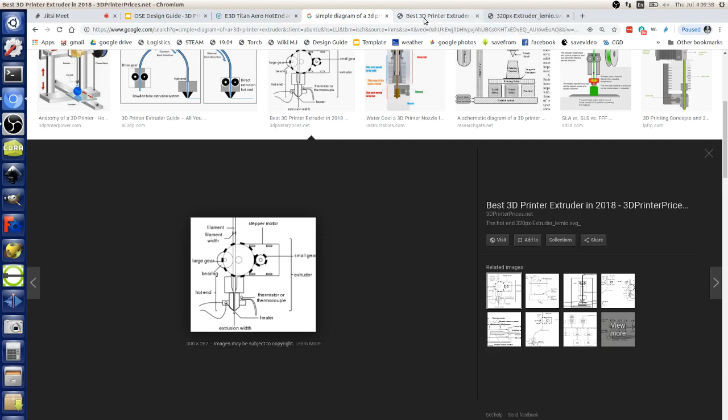So let's look at another image of an extruder, just a basic simple diagram of a 3D printer extruder. So here's a decent one. Let's just take a look at this one for what I just described. Okay, that diagram there is kind of small. Let me go back up. Open image in new tab. Let's just expand this and take a look at this picture. So it's a simple diagram. You've got the stepper motor.

In this case here, what you have is a gear down extruder, and that's actually what happens within the E3D Titan Aero. That's what we're using right now in our printers. So you've got a small gear driving a larger gear, which then feeds the filament. So you've got gear reduction, so you want to push with as much force as you can. The gear designs are necessary if you're working with 3mm and up. If you're using 1.75mm filament, you don't need a gear down from the stepper motor typically. And typically here we're using NEMA 17 motors.

So the filament goes down, it gets pushed, and what you see there is also found in other machines, such as the wire feed of a welder. So if we open source the design of a generic 3D printer extruder, then we also get into applications like wire feeds for welders, or perhaps wire feeds for mixing alloying wire into your induction furnace. So anywhere you have to have a feed of some kind of a wire, large or small, this kind of mechanism is quite relevant.

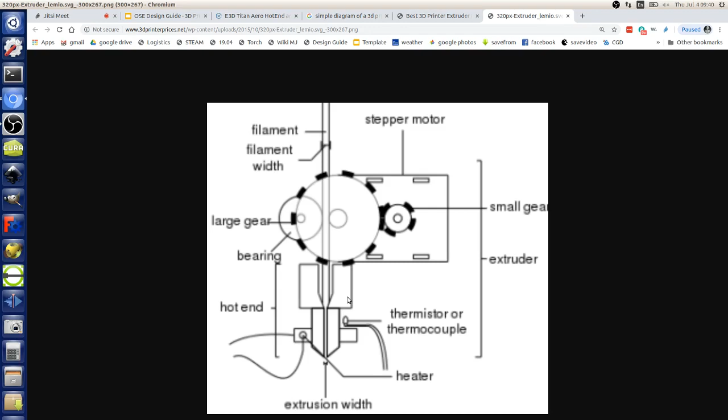So you've got the wire feeding down, you've got a heater element, and then the nozzle and a thermistor, because you need to detect what temperature you're at. You have to know what to set it to. Your software takes care of that, but you have to have feedback to know what temperature you're at. So that's the generic design of an extruder.

And then there's two main types of extruders: direct versus Bowden. So this is the generic diagram here of direct drive versus Bowden drive. In direct drive, you've got the gears going directly into the heater block and nozzle, whereas in the Bowden style, you've got the wire feed separated from the heater block on your gantry. So the filament feed can be mounted anywhere on the printer, farther away from the nozzle. Now you can guess that may be limited. It's got advantages and disadvantages.

The advantage of the Bowden setup is that the tool head becomes very light. You just have to carry the heater block and nozzle. You don't have to carry the relatively heavier stepper motor and all the other drive components. Not necessarily that you're able to achieve higher speeds, but you have less inertial effects, meaning you've got more stable prints. There's less shaking as you reverse direction, so you can go much faster. If you have that entire extruder on a gantry like we do, your frame has to be stiffer to accommodate all of that.

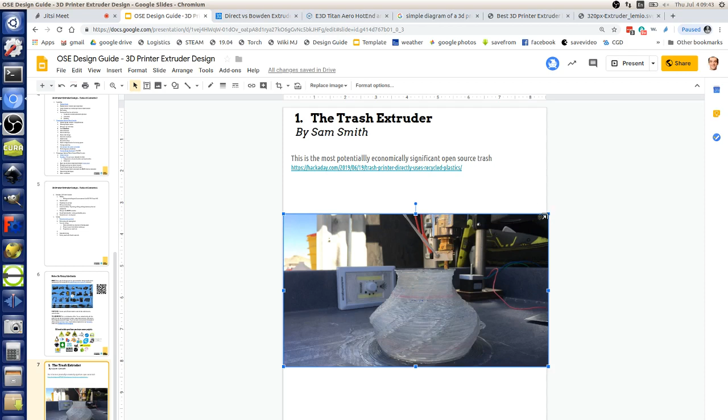Matthew? Question about the thing about extruding trash, because my understanding was that you have different plastics with different melting points and different material properties, and so it seems like you have to at least select your trash very carefully. Is that true? Yes, absolutely.

If you want to do generic brute force printing with a large nozzle, you're throwing everything in there, you're going to get a mix of uncontrollable qualities, which may be acceptable for a thing like outdoor exterior plastic lumber, which doesn't have to have a lot of precision. But typically, if you want any engineered control, you want to separate your trash, and more than that, even know what kind of plastic that is. There's many types of ABS or PLA blends.

When you think about 3D printing filaments, the material science there, you can have a blend of anything with anything, and you have to know its properties if you're going to have controllable results. Here, for example, Sam is printing directly with polypropylene, I believe. So he had polypropylene that he shredded up and put into the system.

But if you want engineered quality and controlled results, you have to know exactly what you have in there, because you don't want your filament to have one property at the beginning and completely different properties at the end of that filament, because you're just going to mess up your prints. So there is the whole material science aspect of that. But the good thing about it is we can experiment a lot with it.

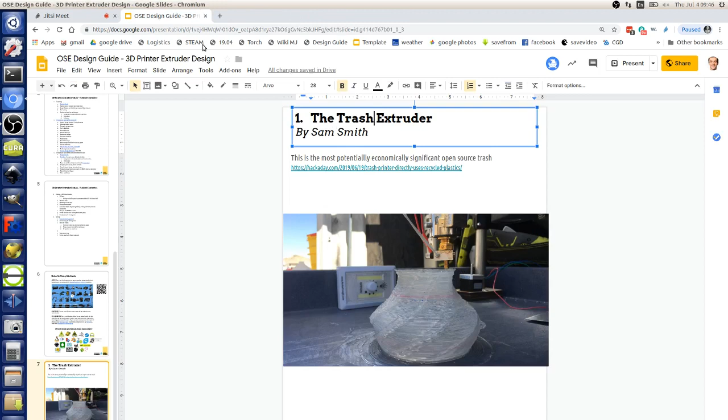So moving on here. So those are the main types of extruders. This is absolutely open source here. There are open source versions of this, but nothing is well defined, well refined. I think Sam is doing the most cutting edge work on this that I've seen, at least. There's a lot of work like this in various countries. Most of it's partly proprietary.

So once again, we are into the issue of people saying, "Oh yeah, now I'm gonna make millions, and I'm gonna hide this because this is too good." That's a typical issue with open source. Once you get something that actually works, maybe 99.9% of the people disappear, and that's one of the challenges of the collaborative literacy in our world today.

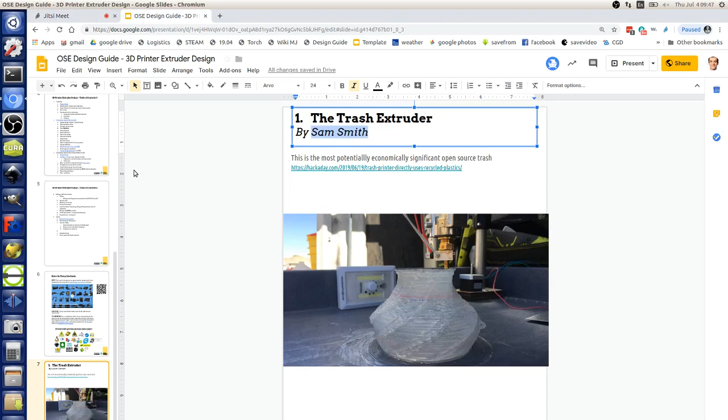Okay, so moving on to more topics here. So let's talk about designing the optimal plastic extruder. So we'll go to a page, and when we talk about an optimized plastic extruder, that means something that can handle both regular plastic and rubber. I don't see any reasons why you cannot optimize for both in one. So here's what I've drawn up so far in terms of what optimization would look like, and it might look a little different than standard ones.

So, design rationale. First of all, if you want really good feed on your filament, you want to have two drive gears, one from each side. If you're driving from one side, typically what happens is you drive on one side and the other one is an idler that does not spin, or it's not actively driven.

If you want the higher, this is now for larger, faster, better extruders. You want to first of all start by driving from both sides. Now maybe you even want to do a second set of drive gears to get double that drive force there. Because the thing is, because plastic is soft, it will wear out. You can only push it so hard with a set of teeth before you actually wear it out. So for optimization, you definitely want to start with double-sided drive.

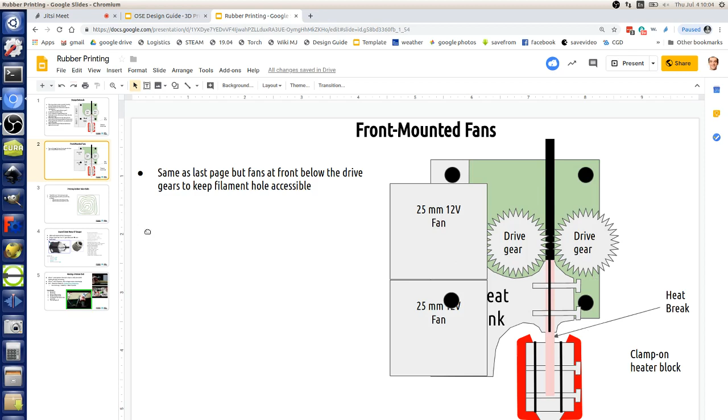So we kind of talked a little bit. Here's just another configuration. I was thinking, okay, where are we going to put the fans so that we can still cool the system? And printing belts on a small area, you can just curl up your belt on a print bed, so you can get like a 2-meter belt on an 8-inch by 8-inch bed, mixing metric and imperial here. But that's the case for rubber extruders.

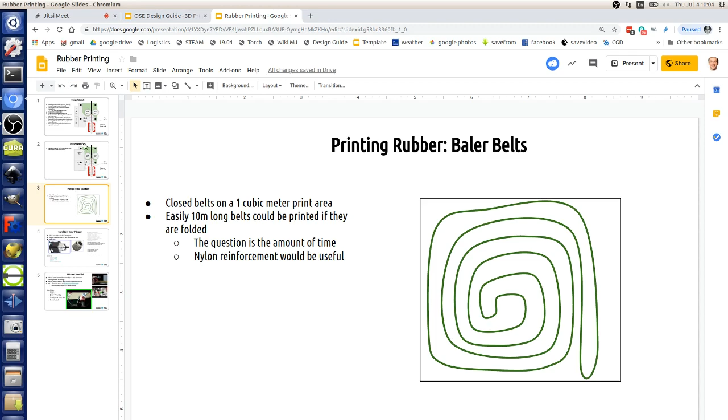This design here is optimized for rubber. The shortest possible path between the drive and the heater part. So I'm including the clamp both at the heatsink area and at the heater block area, which means that the component there is not a threaded long tube. It could be just a tube, which is much easier. You don't have to worry about first threading that tube. So absolute simplicity.

This is the next generation. This is going to be universal in a few years, and you've seen it here. I mean, it has to be. When we talk about improving performance, this is such a gap in the community right now. You cannot really print anything large with rubber right now. Yeah, you can print in rubber, and people advertise that, but very slowly. Not in a way that is economically feasible if you talk about actually making real parts.

What thickness are we talking about with the filament? Here we're starting with 3mm filament, which is off-the-shelf standard. When we design this ourselves and start extruding our own filament, we probably want to go to 4 or 5. So you have an easier way to print. The larger the filament, if you have an error in its diameter, that error will be less as a fraction of the overall width. Therefore, the quality control requirements for producing larger filament are much decreased compared to 1.75 filament.

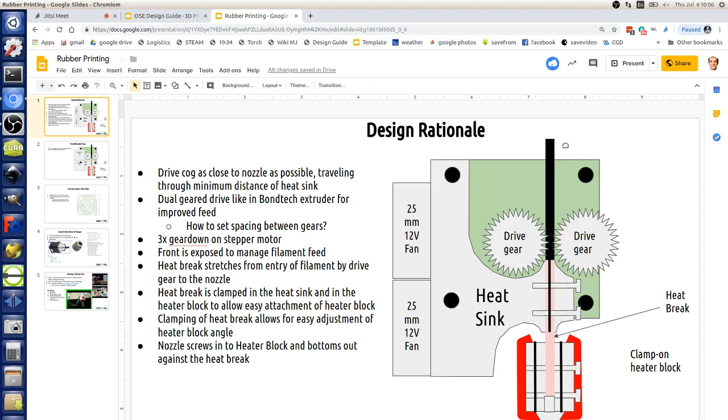So you can get away, once again, with this trash printer and what we call shilament. Guess what that is? Crappy filament. You can have crappy filament, OSE shilament brand, and still get perfect prints, because the variation, even if it's not acceptable for 1.75mm printing, will be well acceptable for large printing and large parts like plastic lumber.

Are we talking about rubber that we get from tires and convert to this, or what type of rubber? Thermoplastic urethane or other thermoplastics are what we're talking about. This is not the same as a lot of tire rubber, which is from rubber trees. But some tires are made from thermoplastics. For example, a lot of snowmobiles have thermoplastic urethane tracks. Usually that's abbreviated to TPU if anybody wants to look it up.

TPU, TPO, thermoplastic olefins. There are various rubbers that are thermoplastic. That means you can melt them and then remelt them and use them again and again, which is good for the environment.

So how do we get this? If we want significant drive, and you notice we're eliminating gear down. So how do we do that? Well, we'd want to use a motor that already has gear down to simplify the actual extruder design, because the current extruder design has a gear down built into it, a 3-to-1 or 5-to-1. But that makes the design where you have the drive right next to the nozzle not possible.

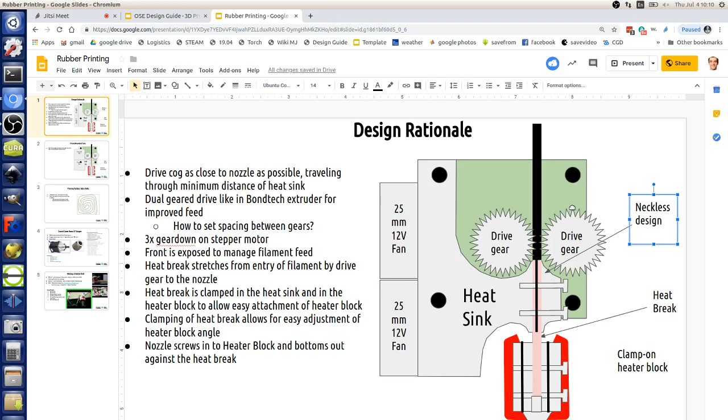So the idea here is start with a direct drive system, meaning the stepper motor there is already geared down. You want to use a light stepper motor like a NEMA 17. This is, for example, a NEMA 17 with a 5-to-1 gear down that you can apply in this system. But we also talked about OSE Wiki 3D printed planetary drive. Let's show this. So let's get a built-in planetary gear down onto a regular NEMA 17 stepper motor.

So planetary gear 3D printed, let's look at what 3D printed gear downs look like. 3D printed speed reduction, planetary. There. Look at that. That's a NEMA 17 motor. And this right here is feasible for what we are showing here. This is about $30 or $40. This here is a couple of dollars plus an $8 stepper motor.

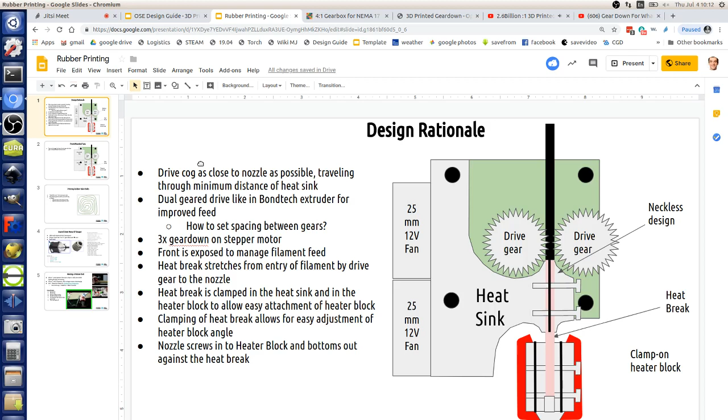In a motor like this, the only challenge is, do you have enough accuracy to do retraction properly? I don't see why not. You spin it one way and you spin it the other way. We may have some difficulties using this for, say, the axis drive. I don't know, haven't tried it. So you'd have to make sure your prints are pretty good in order to retain the accuracy. But the way to address the accuracy here is you have this brute force 3D printed gear down, and then

instead of direct drive of a pulley, you can have another gear down where at the end of the day it might actually work out, because whenever you have a gear down, that step motion is going to be decreased. So right now we have 10 microns. With a further gear down after this, or if you gear this down enough, you already have the stepper motor, which we said has 3,200 divisions per revolution. Well, this is getting you even finer motion because it's gearing that down further.

So there's a case to be made that this could actually be more accurate, even though it has maybe a little backlash, meaning the non-meshing. And we covered backlash yesterday. The non-perfect meshing, like there's a little space between gears. Even if it has backlash, say it's a 5 or 10-fold gear down, if the backlash got your results twice as bad, but the gear down compensates, you can possibly do even better.

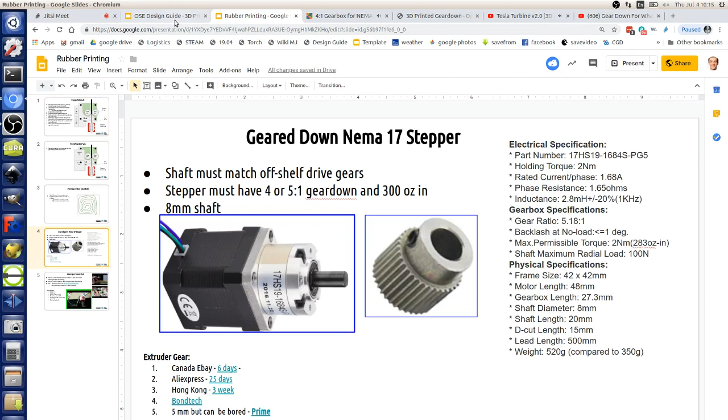Experiments to be done. So the idea being, if you engineer this or you keep playing with this and refine a system, you're freeing yourself from depending on these, which are much more complex. So moving on, let's talk about scalability. So we covered a bunch about the optimized design.

Let's talk about scalability, and then we'll wrap up with how do you design filament makers, which are quite related to this. You're melting plastic, and you're extruding that and pulling that out, so it's just a filament that you roll in a bunch. So let's talk about scalability.

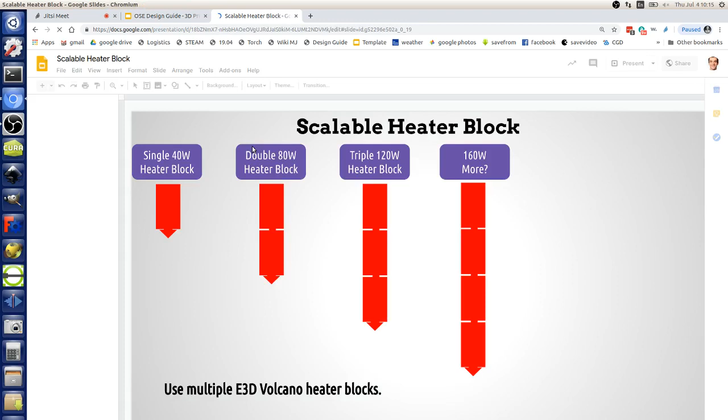We mentioned that you can buy a small heater block for $1, but if that heater block is about 5 times bigger, it's like 2 inches long, it ends up costing $110. So this heater block, they have ones that are that long, that's the super volcano, but it costs quite a bit. So how can we do better with simply stacking 2 of these together?

So take 2 volcano nozzles next to each other and stack them, just like this. So there you go, single 40-watt heater block, you're doubling them, tripling. Why don't you keep going? The limit's going to be how much plastic you can melt through that, like the thermal contact area, and then you need more force to push this.

But two of them, yeah, you could absolutely do that with the existing Titan Aero. Just put two blocks on, but there's details of how you would do that. So let's take a look at that. In the threaded design, these are details for threaded design. If you wanted to take off-the-shelf existing parts that cost a few dollars, double that, so you get under $10 for a $110 value of heating power otherwise.

So when you thread them together, first of all you've got a heater cartridge in there, the purple stuff, and then you've got a thermistor, so you've got a little bit more of wire management. But how would you do that? Well, design detail using standard parts would be you have the existing heat break, you follow that with an M6 threaded through hole thing. You can actually get bolts that have little holes through them. This is from McMaster-Carr. That's a FreeCAD step file imported from McMaster-Carr.

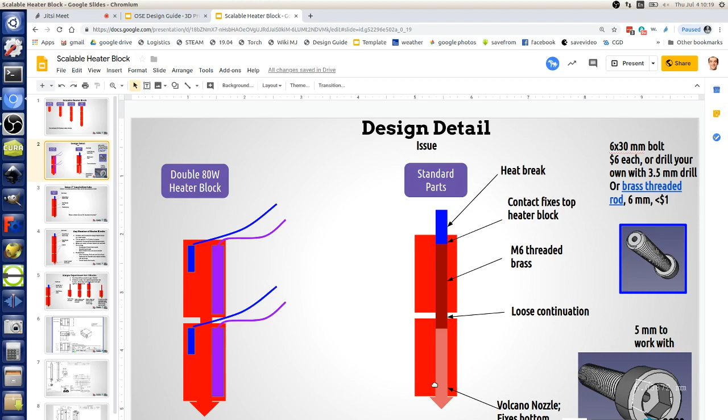So what about doing this one real super long nozzle? Yes, they exist. You can get one for a few bucks for the super volcano. They're maybe $10 or so. So yes, you can use that. This is the volcano nozzle. You can use the super volcano nozzle, so you can eliminate that block right there. But this is once again where the next step.

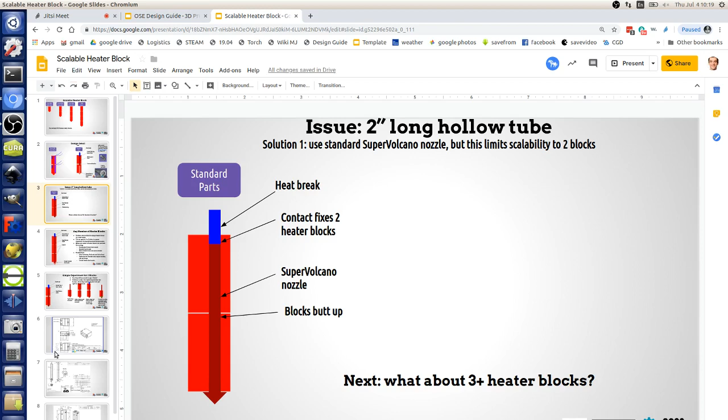See, right here, we've got the example. We've got the heat break and a super volcano nozzle, which is long and it stretches through about 2 of those heater blocks. So maybe you can do that. And what about this? Yeah, if you keep going further. So you can kind of think about what the deal is. But once again, the control of the angles is going to be like good luck.

But the only relevant part for the angle will be the part at the bottom where you want the fan close to it. So maybe you can do it. Or maybe mount the cooling fans just farther away, so design that angle dependency out of this. But then pretty much all your printers will look a little different. Each of these heater blocks might be at a different angle, which is just visual. It could still work, I guess, but you have to consider ease of cable management.

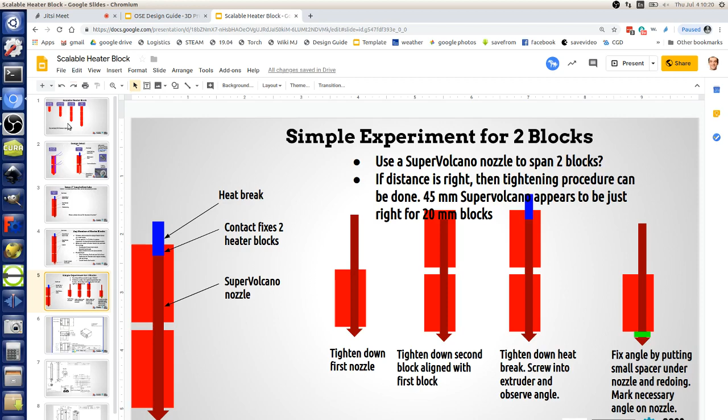You want it all to be nice and neat so you can manage everything properly. So the next deal on this would be, what I would suggest is do exactly this with clamp blocks. So now you can cut your simple tube to be as long as you want. At the end of that tube, you still need the contact between the long tube and the nozzle. So that's a missing link.

You'd still have to get that nozzle tight against that whole tube, which is incompatible because you can't. How do you mix clamping with bolting? Maybe you can thread the very end of that, screw that in. The rest of it is unthreaded. When you slit it, it might just end up that it comes back.

Nah, too tricky. So here in a scalable heater block, you are probably left with, you've got a long tube, and into the end of it, you would have to make your nozzle part of that long tube, which I guess is a little bit of machining there. So how about a tapered nozzle that as it clamps, it bolts it? The tapered side of the nozzle on the inside? Oh yeah, okay. So right. Like collets. Right. So, thank you.

So, we said that if you have a clamp design here, which I haven't shown any clamp designs here because I was thinking about using off-the-shelf parts, so something that anybody can get without having to slit and find these other parts that are easily doable, but nobody is doing that right now. So you got a long tube that's straight, it's clamped on. At the very end, you just machine your nozzle to be without threads, period. Done.

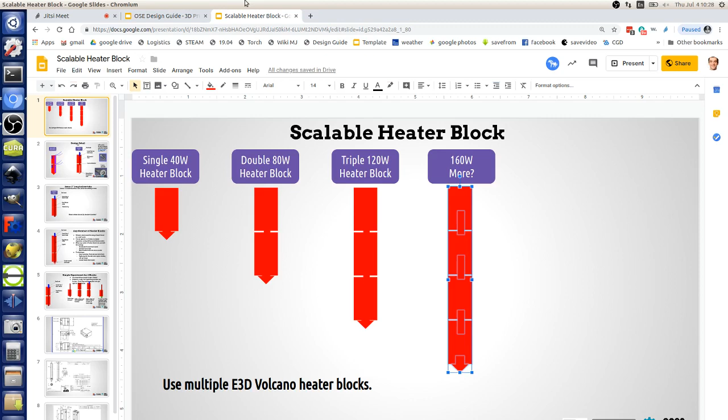Okay, so multiple blocks. We covered that a little bit. Last thing is open source filament makers. So we can start with, well, 3D printer extruder. Let's cover this one real quick. What William did here, this is a basic design that's copied from China. And do you think this thing works? We haven't tested it yet. So we still have to.

There's one detail. It needs a shorter screw. I just put whatever M3 screw I had. It needs a shorter one so it can fully flex around. And also, there's a part that should be in your mailbox that goes right there. Okay. Somewhere in your house should be the other part. So you can make these things.

So here we have the heater block. If you want to make a low-cost extruder, not filament maker, but extruder: heater block, heat sink. And where do you put the fan? The fan can go on the outside. It actually attaches to this screw, and it just swings back. Out of all the extruders I've ever seen, it's the most reliable. In 3 years, it jammed like twice, and when it jams, it's less than a 5-minute process.

Can I show that to the people outside? So this is an example of a homemade extruder. Heater block. It houses a little heater element, your nozzle, your heat break, heat sink. There's a gear that's missing, but this is the filament feed. The filament goes in there and gets pushed through. So this is on a wiki under simple extruder.

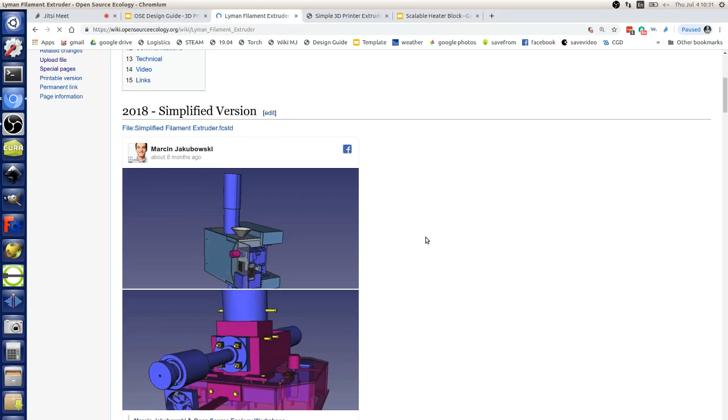Lyman filament maker. So that's the CAD in FreeCAD. This is the Lyman we built in the bottom, and this is what we had going on. So you've got the hopper. It's a wall-mounted system. It's actually in a workshop. You put pellets in there, and you're extruding filament. And we've got plus minus 0.1 millimeter out of the system.

You've got a spooling system where, as you're making the filament, there's a roll that rolls it up, and it's activated. The way it works is the filament drips down, and it's on-off. This is the spooler, but the way this spooler works, it turns on and off periodically. So this is the actual spool we made. But you see that there's an on-off switch.

That switch there, when the filament just dribbles down, it falls down and activates that switch to activate the spooler. And this is like, we've got to improve that. I mean, these rubber bands and stuff. It needs a little refinement. But all the systems are there to make that work. And this is what we got. Looks beautiful. This is from pellets. This is not from trash.

Pellets are $1 a pound in bulk, or down to 50 cents a pound. 50 cents to $1 a pound if you buy a ton. If you buy a small quantity, they're like $4 a pound on eBay. So at $4 on eBay, you're getting close to the $10. It's about half the $10 value. But if you get bulk and you actually start doing this seriously, there's 10x lower cost from pellets and 100x lower cost from trash.

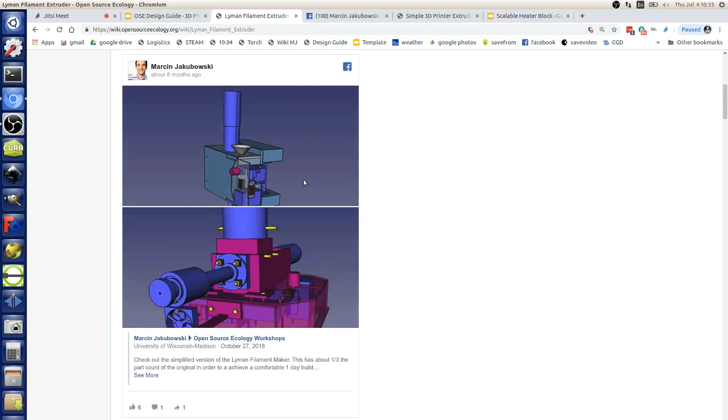This is great, but we don't stop there. We said, okay, Hugh, let's simplify this. That's a little too much there. So how do we do the absolute simplest version of that? This is the next iteration. I call it the simple 3D printer filament maker extruder. Let's take a look at that. This is on FreeCAD.

You would go to the link in the Facebook page, 2018 simplified version. The CAD, where's the CAD? There's the CAD. You can download it. Let me download it. What happened there? I'm going to download this file and show you in 3D. But I said, okay, there's our filament maker. Still too complicated. Let's make it more simple.

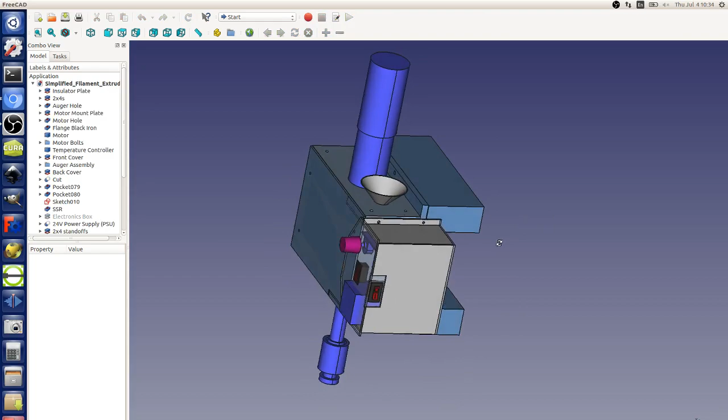So this is the simplified filament extruder, now using much more standard off-the-shelf parts. Hugh is printing that casing and putting all the components in there. But how do you do it with 2x4s while retaining heat safety and all that? So let's take a look at this one. Just stripping down any extraneous details like the 3D printed parts. So instead of doing what Hugh's done there, I'm doing this. So there's a 2x4 on the back, your power supply is on the back.

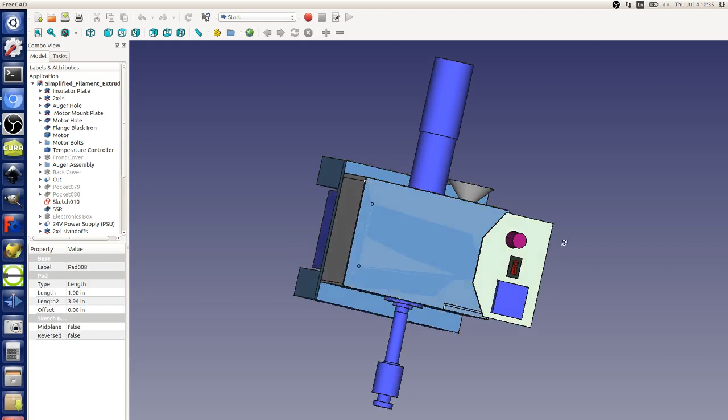If you open that up, how do I hide that? It's not hiding on me. Well, basically I attached the controller right on the side. Now we're starting to see the insides of it. But basically, this is 2x4s or 2x6s there. You've got a hopper here, so you fill this whole thing, and there's an extruder, basically a drill bit right there. Let me hide that.

There it is. So you've got a coupler, you've got your auger, which is a 1-inch drill bit. I would make this into a 1-inch system. Hugh does this with a 1/2-inch bit. The Precious Plastic guys use a 1-inch bit. Why 1 inch? So you can just throw more nasty stuff in there with more resilience.

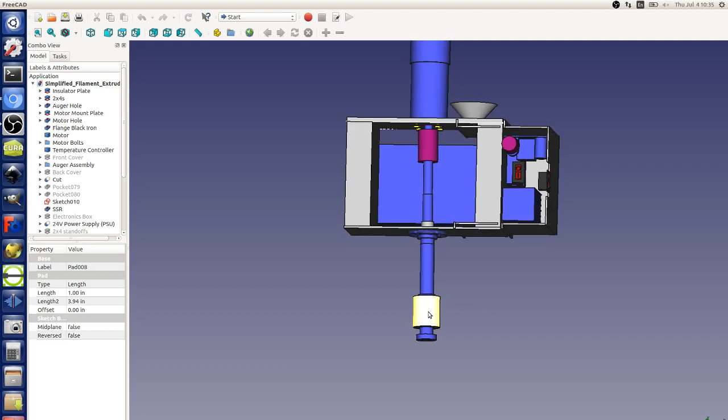So you want it larger. Here with the Lyman filament maker, you've got a single heat band. You can make multiple heat bands, say for a 1-inch extruder like this. But the compartment in there carries a few pounds of pellets. You throw that in there. It's wall mounted, the controller is next to it.

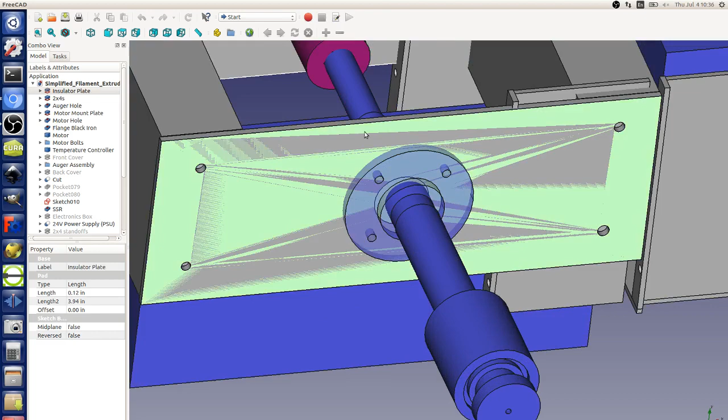There's a metal plate, so this gets hot right here. So you got a flange, and then you've got a piece of metal. So metal against wood, but if it gets too hot we can put fans on this. But this is detail. So you've got the metal flange, underneath it put an insulating piece, and then on the other side, essentially there's no contact between the hot part and this metal here. So this metal should be lukewarm.

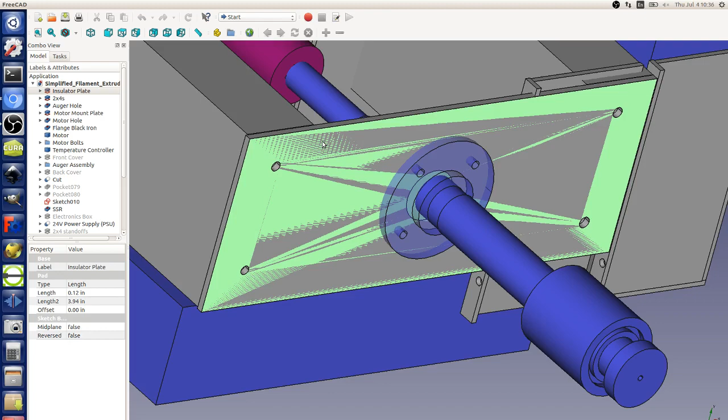Put an insulator under this flange here, and there is no contact here because there's a big hole. Just putting a sheet of that welding blanket there? Yeah, welding blanket, for example, is a good insulator. It's a high temperature thing, like thousands Celsius or something. It's called welding blanket, and I think it's made from carbon fiber, is it? Yeah. It's a carbon fiber welding blanket.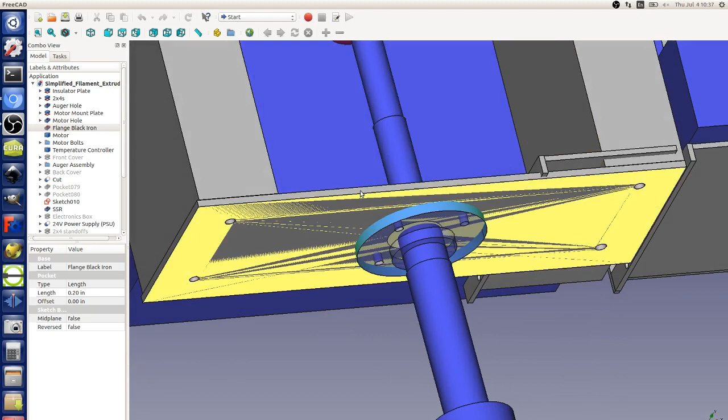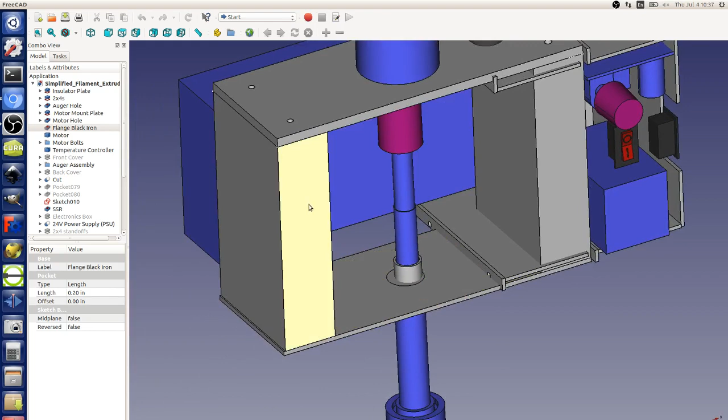You can use a ceramic thing down there, maybe ceramic standoffs, but this is the hot part. You're talking about 200 C. 200 C and wood do not mix. Pyrolysis begins around 100 C or lower, like 80 C. You start breaking wood apart, and this is 200 C. But I like the wood idea. This is just a simple metal plate and wood, and there you go.

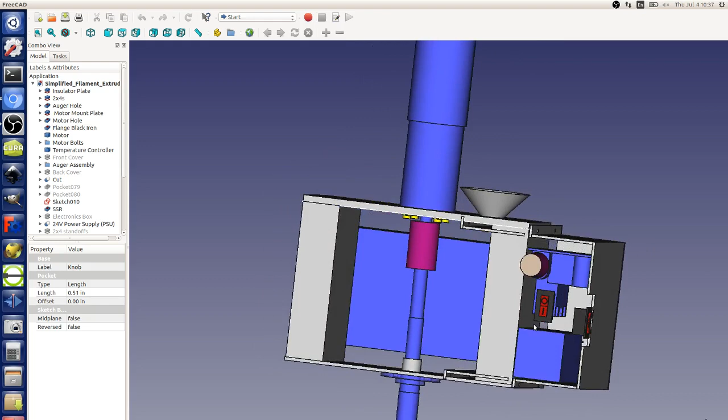Now for the motor there, that's the motor that we've used in the pictures. But look at this, that is super simple. You can build that in a few days from scratch. The controller is here. So what do you have in a controller? You have the same solid state relay. You have a knob for selecting temperatures, so there's a temperature controller. This is essentially your thermal probe, like the thermistors in our printer system.

You've got an on-off switch. You've got a power supply in the back. This is 24 DC for off-the-shelf heater blocks. But we are learning in the shop right now. We have built the heat beds, which are nichrome embedded in fiberglass sleeve. So get rid of the power supply. Use 120 AC. Use the universal controller.

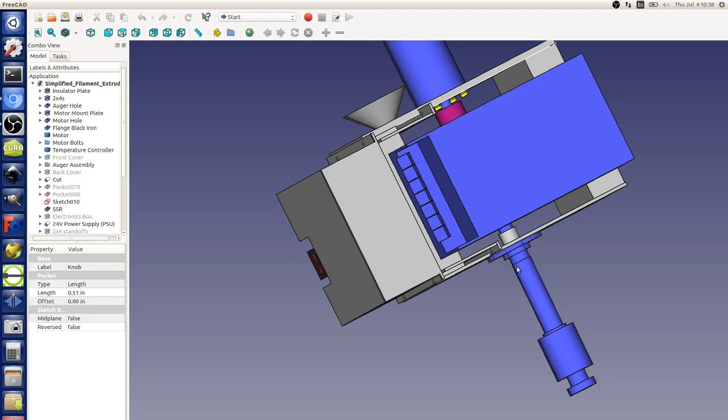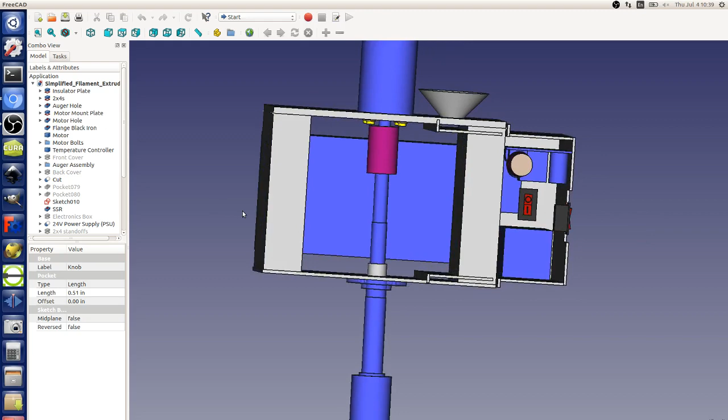Now that I'm thinking about it, I haven't come to this in months, but now I would just put the OSE universal controller on this and forget about all this novelty here. You have the capacity to turn on a solid state relay and 120 AC. I would get rid of this, which is a whole bunch of different things arranged differently. Use the existing 3D printer controller, and then you have an LCD screen so you can be more precise in what you're doing. So that will be the next step on this.

Awesome. Do you think the hardest part will be to make the heating element on the bottom? No, it's actually one of the easiest parts. You can buy an off-the-shelf, like a $5 heater element, or you can make it. When you buy it off the shelf, you're limited to like 100 watts. With a nichrome wire, you can make it 500 watts or whatever.

But here, the hardest part, I would say, is the nozzle, where you have a little through hole, like 1 millimeter or so. I think in Hugh's system, he's using a larger than the filament hole size. He might be using 3 or 4 millimeters for 3 millimeter filament, because as the molten filament drops down, it thins down a little bit. And there's two ways to think about it. You can have the hole smaller or larger depending how you're pulling it.

So little details there. But to me, the hardest thing is you have a nozzle with a little hole through it. So you either have to buy that somewhere, or possibly even use the 3D printer nozzles that you drill out. The largest they make is 1.2 millimeters. I guess you can drill that out to 3 millimeters, and it could work.

So maybe instead of that brass plug, you're using another fitting that's reduced down to where you can screw in the 6 millimeter 3D printer nozzle. That might be an interesting thing to do, because otherwise you have to drill something from scratch, whereas if you already have that nozzle, you can ream out that hole. It's self-guiding. It will be very straight.

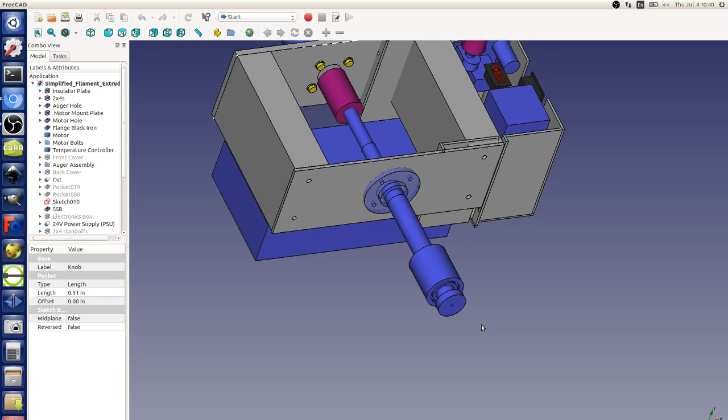So that might be an advantage of doing that. So that's it. Multiple nozzles for different thickness, and then you can screw in the different nozzles for different filaments. So that's the basics of the 3D printer filament maker. What are the critical things?

You're controlling a heat element. You're augering the pellets that go in there. And before that, you want to shred, so you're working from trash. And the shredder, let's just go check out the shredder. But what you need to do for the shredder is look at Precious Plastic and replicate that. So that's doable, but the current design of the shredder, the issue there is that it wears out too fast.

It's got 1/4-inch blades. I would do this system and then cut out 1/2-inch blades that, when scaled, get you to your rock crushers and things. But do a little bigger than this. What people found was these blades on this tend to wear out too fast. They're just 1/4-inch thick. When you're talking about even grinding plastic, you've got rubbing and stuff like that. So you want to harden that.

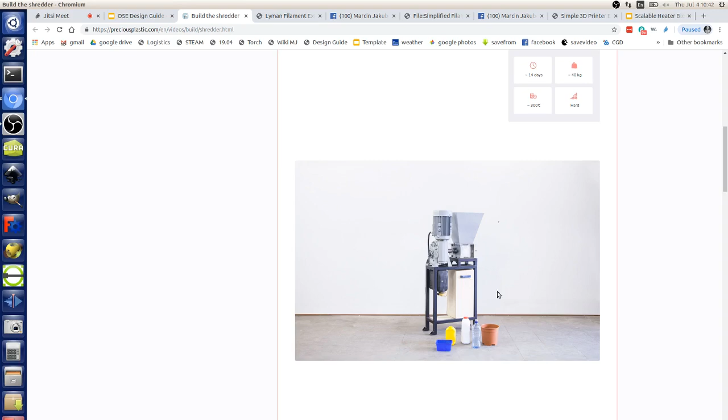So maybe after you cut, if you cut with a torch, there's already some heat hardening happening, because a flame hardens steel that it cuts, even if you're doing mild steel. So not laser cutting, but torch cutting with a carbon-containing oxyfuel gas, like oxyacetylene. The carbon that comes from the flame actually hardens the steel itself. So shredders, Precious Plastic, if you haven't heard about it, Google that. There's great videos on there for how to build all these machines.

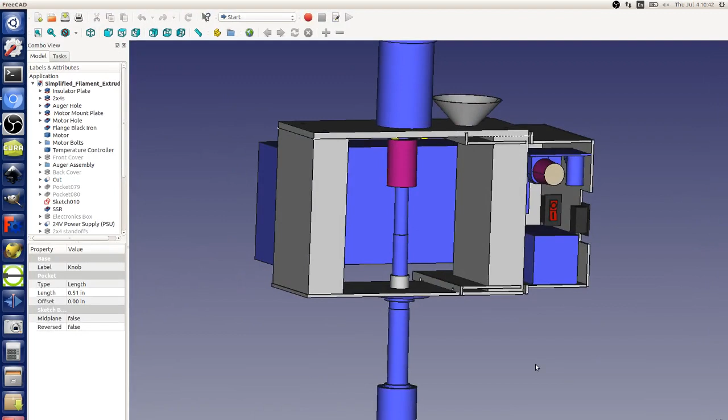In the extruder, some people call for a breaker plate. So in the more advanced versions, at the very end of the tube, you would have a breaker plate, a little plate with holes in it so that it balances out the pressure and maybe blocks impurities if there are impurities in your plastic. But that would go inside, right past the auger bit. The auger bit reaches to within just a few millimeters or 1/2 inch of the nozzle, so you're just augering and pushing it down.

And gravity helps. You have to use less force in terms of augering here. So I think the wall-mounted design is decent for doing that, as opposed to horizontal, where you won't get gravity assisting you. Here you're going to have a more uniform flow, because in the horizontal system, gravity draws things down. So this is easier at the DIY level.

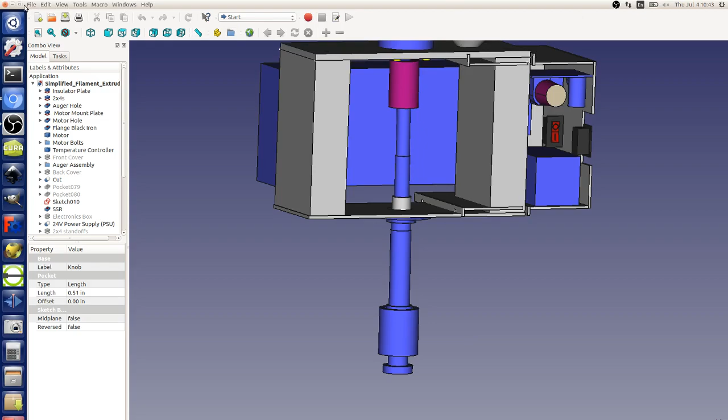Does room temperature affect the filament once it's coming out, or do you have to cool it down at a particular time? It does. Because in our system, you have basically this thing dribbling down from your wall, like a meter of this filament. Depending on how hot the room is, if you're in the Arctic and it's near freezing, obviously that's going to get you different results. So you want to control the temperatures of that. You want to cool it somehow quickly though, don't you? Because you're going to be blowing it.

So the interesting thing about the Lyman filament maker is we're doing no fans, no cooling. What happens is you extrude the gob, it thins out a little bit, just because of gravity, the steady rate of pull. It's just gravity that's pulling it. So it reaches a dynamic equilibrium and it's not subject to so many anomalies. So Hugh showed in his videos plus minus 0.05 millimeter, and when you look at the picture, you can't see any differences in thickness. It's actually pretty impressive.

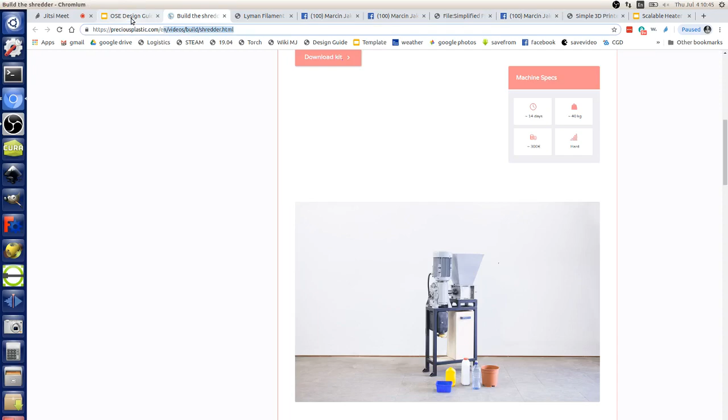To review that, this filament looks pretty good to me. We can bring it down if you want to actually test it. I've never used it because I'm too proud of the first roll of open source filament. Yeah, it's ABS.

Okay, so last topic. Do we have anything else here? Solid-state relays. Okay, so getting back to extruders, one important part about extruders is the retraction, because that's what's going to get you perfect prints. Let's talk about retraction and maybe wrap up. That's one good thing you have to think about, because this video here shows you the different results when.

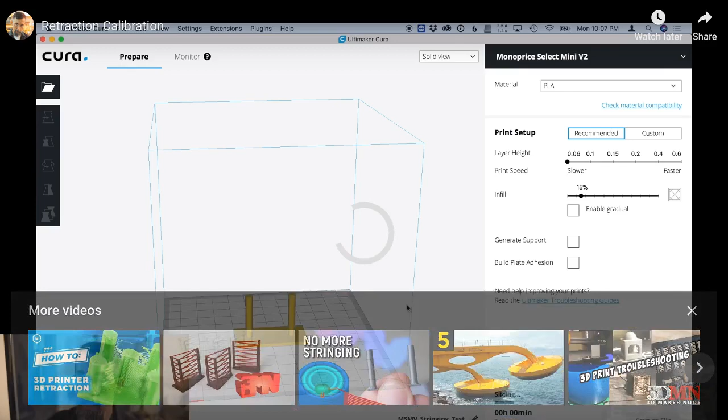Okay, let's refresh that page. This cover page here shows you what happens when you don't have enough retraction and you're skipping between one post and the other. You have a little piece of filament that's just dangling, making this thing that shouldn't be there. That's perfect retraction. You retract just a little bit so the filament pulls away and you're clear to jump

to the next place. If you have too much retraction, you're actually pulling enough filament that you're not able to extrude enough when you start printing again, and then you get very weak parts. So do this test. That'll be like your ultimate arbiter of your retraction settings.

In the Cura interface, you select the length of retraction and speed of retraction. And those are some of the settings that, when you're doing production engineering and you're open sourcing, go into your initialization file that you save and give to other people to say, okay, now I've figured out how to print this exactly. These are all the settings. This will be one of the settings.

Because depending on many factors, like what filament you're working with, all the filaments will behave slightly differently. So you want to optimize this for every filament and save that settings file so you don't have to do the figuring out the next time. So I think I'll wrap up with that and maybe take any questions.

So here in this session you got some insights into the theory of what an optimized filament extruder for a 3D printer would look like. Let me quit the screen sharing.